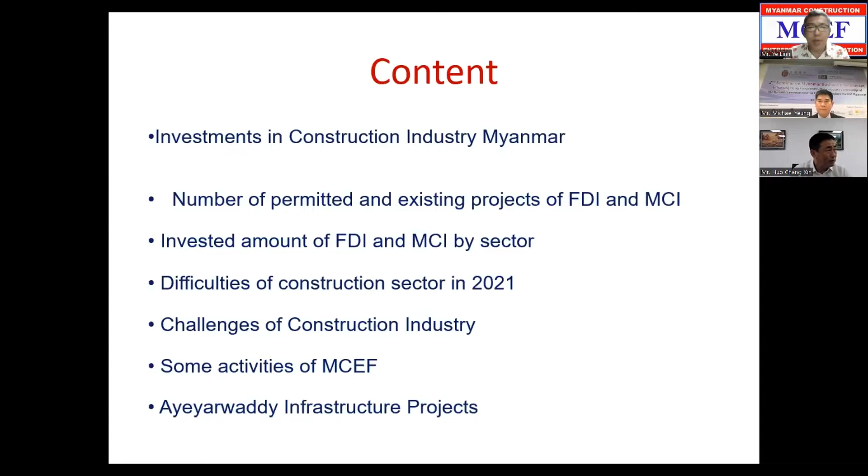Myanmar Construction Entrepreneur Federation, MCEF, was established in 1996. Since then, Myanmar's 15 states and divisions each have an MCEF chapter. MCEF has around 10,000 members, making it one of the biggest federations, with quite diversified business as well. Our members are not only in construction, but also banking, hotel and tourism, mining, manufacturing, logistics, and trading sectors.

The construction industry boomed from 1993 to 1996, then slowed down in 1997 because of the Asian crisis, and again in 2003 because of the Myanmar banking crisis. From 2015 to 2021 there was another slowdown due to the COVID pandemic. However, now is the right time, with less competition, to invest in Myanmar.

Myanmar construction companies have stayed behind other ASEAN countries in technology, skills, and funding. Funding is the biggest weakness in our construction industry. Regarding power, most LNG-based power generation has stopped due to LNG price increases, so Myanmar has reduced 1,500 megawatts, which is a lot. This has cut power to manufacturing, plus foreign sanctions affected LC and freight charges, which went up many times.

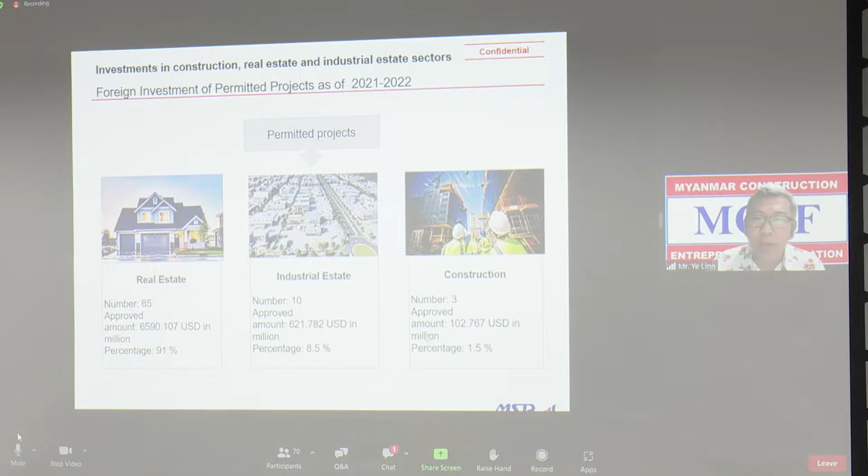We can see in this slide that most foreign direct investment goes mostly into real estate. 91% is higher than other sectors - for example, industrial estate is 8.5%, and our construction industry got only 1.5%. We can see nearly 7,000 million US dollars in real estate investment by foreign direct investment, FDI.

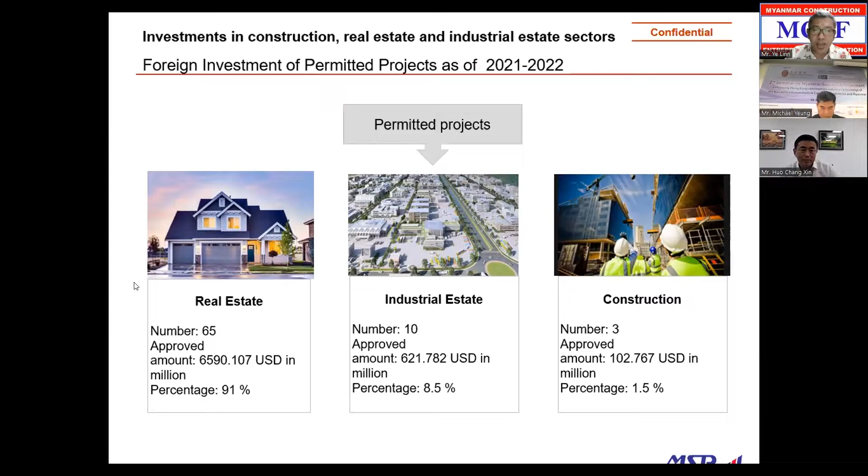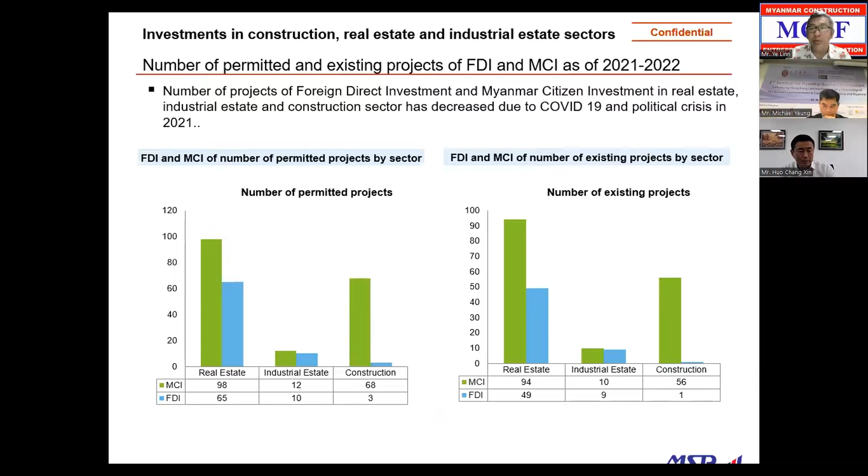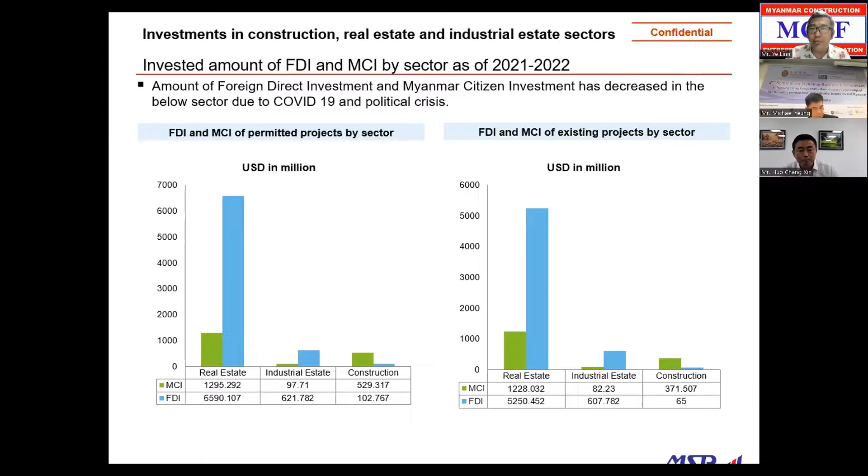Around 7,000 million US dollars in real estate investment. The amount of foreign direct investment and Myanmar citizen investment has decreased in these sectors due to COVID-19 and political issues so far. According to this slide, we can see the existing projects also show FDI investing more, around 5,250 million US dollars in real estate. FDIs invest in real estate more than in industry and construction sectors too.

These difficulties caused a decrease in our construction sector last year. Number one, construction ceased because of COVID and some political issues. Number two, the price of building materials increased because of the high exchange rate. Number three, the price of locally produced construction material doubled because of the banking crisis and higher transportation costs. Number four, the main issue - private banks ceased offering loans after February 2021.

Some constructors are not bidding for new projects because of the crisis, limited profitability, and difficulty in getting loans from banks. In Myanmar, our local bank loan interest is higher than international rates. That's why our local contractors and local developers cannot compete with foreign direct investment and foreign construction companies.

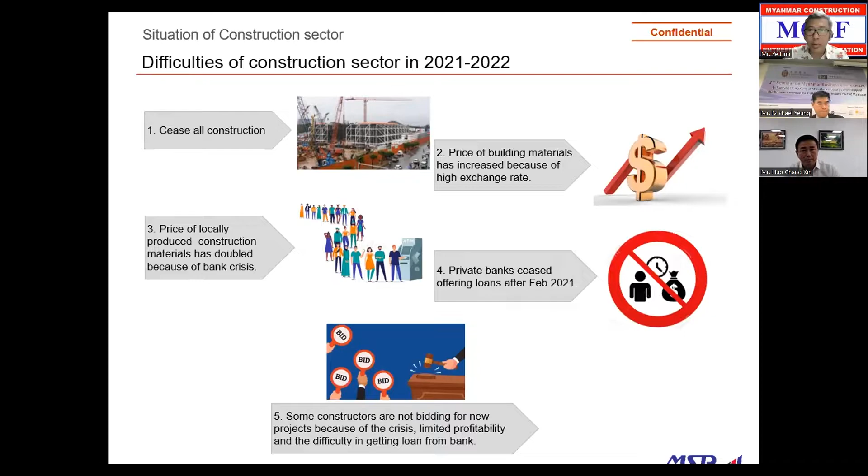Regarding the wages of construction up to date - actually we have to pay 9,000 kyat per day to general workers, which is nearly equal to $5 US per day. That's only for general workers, because of living costs and the rate for some skilled labor.

We can pay them only 250,000 Myanmar kyat per month, but we need to pay long-term workers 400,000 to 500,000 Myanmar kyat. We need to pay 12,000 Myanmar kyat per day to semi-skilled workers, and around 50,000 or more to skilled workers. Actually, this skilled worker shortage is one of the main challenges in our construction industry in Myanmar.

May I highlight the building material price. Actually, Myanmar needs 90% of imported materials from foreign countries, 90% by sea and border trade, especially from China, Thailand, India, Malaysia, and so on. We can produce around 10% locally, especially cement, but we can't buy local cement easily because of the higher price, transportation costs, raw material costs, and electricity. You can see here, HRB 500 MS rod is around 700 US dollars per ton on average.

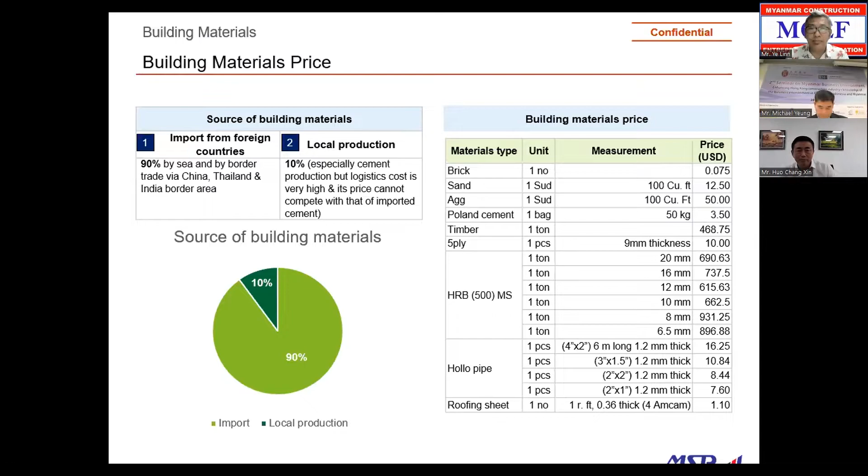May I highlight here housing projects in Yangon, Mandalay, and Naypyidaw. These are working together with the Ministry of Construction and our MCEF. We have bidding for a 100,000 rooms project in Yangon for rented housing, especially for local government staff and low-income people. We need to share this with the construction industry members.

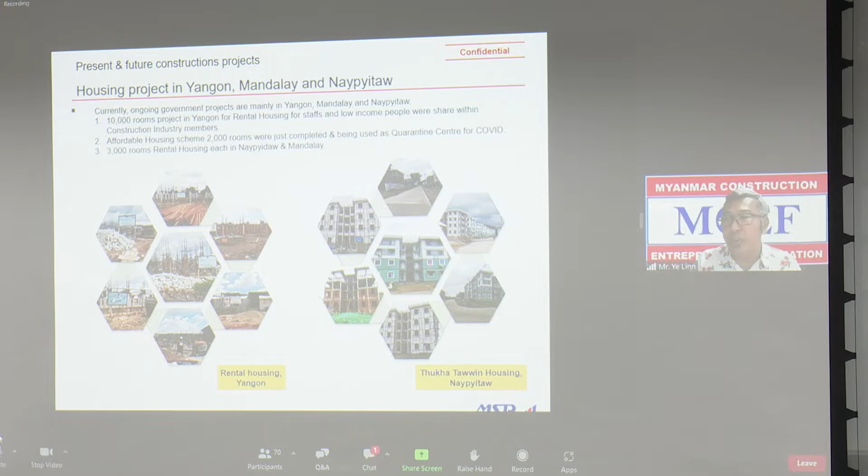Three years ago, we built affordable housing with the Ministry of Construction, around 2,000 to 3,000 rooms. Luckily, we could use these rooms as a quarantine center for COVID. Up to date, we are under construction for 3,000 more rooms, each for rental housing in Naypyidaw and Mandalay.

The government plans to build all of the housing projects in these three biggest cities because of the population, and actually the Ministry of Construction plans to build around the country. You can see this picture. This is a main weakness in our country.

We are still using timber and plywood formwork systems for all of the local construction. Actually, our MCEF proposed to the Ministry of Construction to allow precast construction for these housing projects.

Unluckily, we could not pass through easily with this discussion, so we are still under discussion. That's why may I invite all foreign investors to invest in Myanmar for this precast construction project. I think the Ministry of Construction cannot easily allow our local construction companies to build with precast construction because of initial cost, quality control, and government rules and regulations.

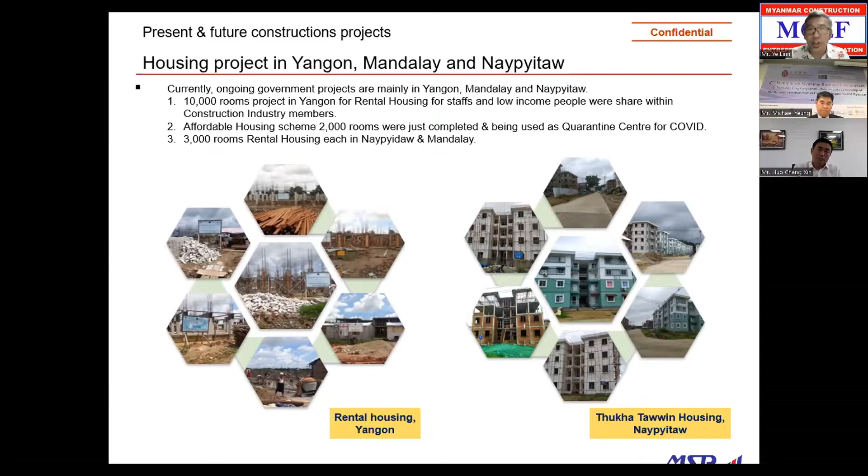These are the latest housing projects in Myanmar. Our MCEF is involved in all of these projects. These are also normal construction methods we are still using.

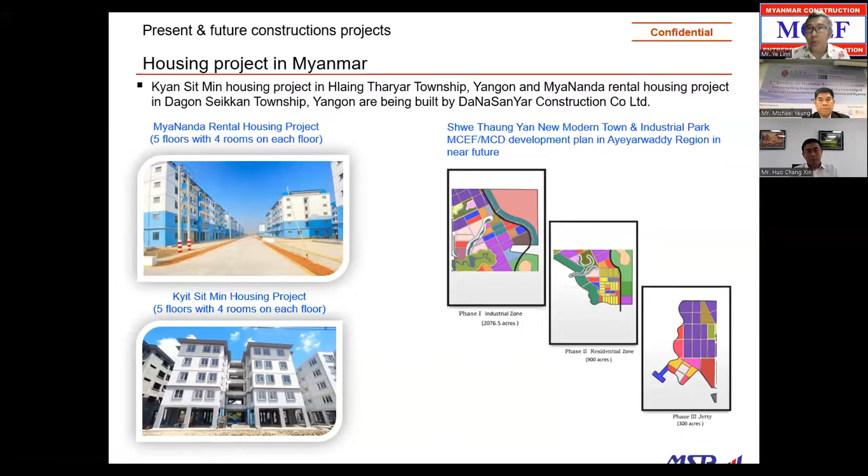Actually, we try to use system formwork, PVC formwork, and steel formwork, but we can't use these formwork systems so far because of initial cost and construction cost. That's why our MCEF plans to build a precast housing project in Shwe Thaung Yan New Modern Town and an Industrial Park development plan in Ayeyarwady region in the near future.

Our MCEF is one of the members of the ASEAN Constructors Federation too. That's why we are involved in monthly meetings, discussions, knowledge sharing, and general yearly meetings too. And we share with each other country reports.

Moreover, organizing with ILO, we cooperate with ILO to promote our construction industry through a TOT course regarding occupational safety and health, the OSH program, for our workers - semi-skilled workers, of course, as well as managers and site engineers.

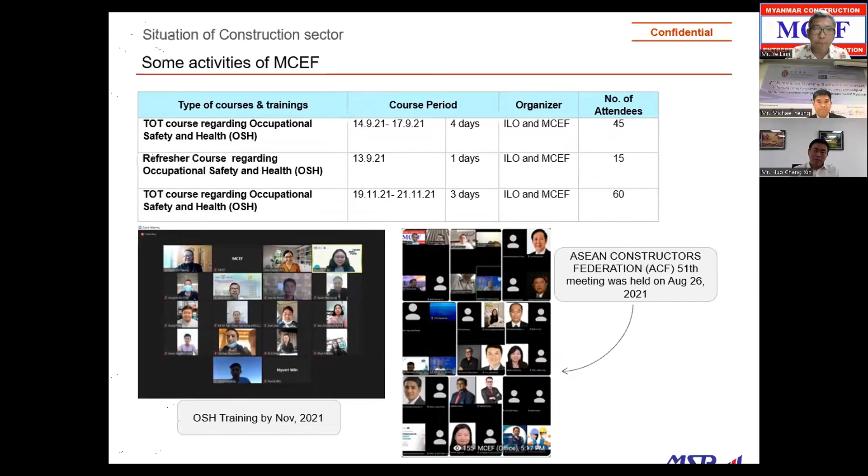May I highlight our MCD, one of our MCD infrastructure projects here. There are five or more areas where participants can join with the MCD or MCEF group. Number one, deep sea port construction - EPC and finance may be available to invest with your FS process.

Number two, industrial zone - this is a heavy industry zone. We plan to build the heavy industrial zone because of the deep sea port. Number three, coastal town and support town for these projects. Number four, highway project from Yangon to this Ayeyarwady deep sea port project, and also a coastal road project.

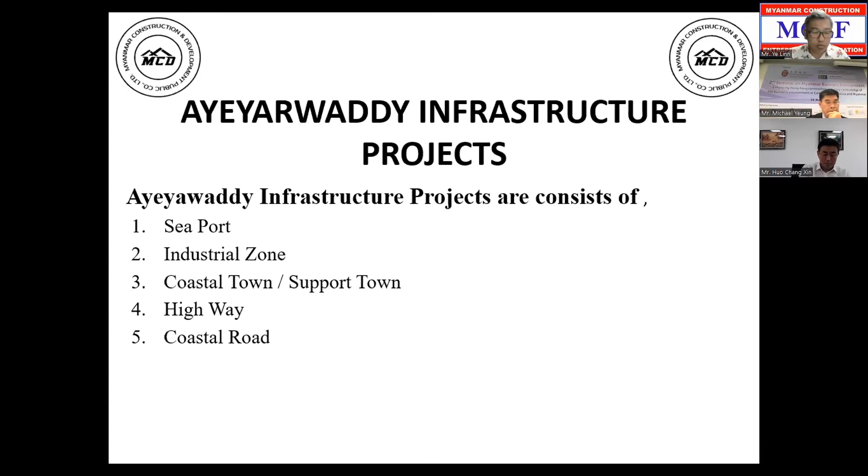This is the seaport. We plan it southwest of Yangon, about 120 miles away, near Chaung Tha Beach. The deep sea port project area - MCD joined with Power China for a pre-feasibility study last 3 years, with some support from Royal Haskoning Company approved to proceed with the feasibility study.

This area is famous in the British Admiralty Chart, mentioned as Danson Bay. It's about 4 miles wide and 4.5 miles long, U-shaped, with a natural breakwater that can be improved into a proper breakwater system without heavy investment. We are expecting around 20 meters depth for 100,000 ton ships to be handled, by dredging sand and surface to build the seaport facility.

The existing Myanmar port is only on the Yangon River since 1890, and due to heavy sand deposit every year, the river became shallow and narrow. Because of this, the Yangon City port area can only handle 12,000 TEU ships, with tight timing.

Near Yangon, 10 miles away, there is the Thilawa Seaport, a project led by Japanese investors, which can only handle 20,000 metric ton vessels. This means Myanmar relies only on feeder vessels from Singapore, with extra handling costs to reach Myanmar.

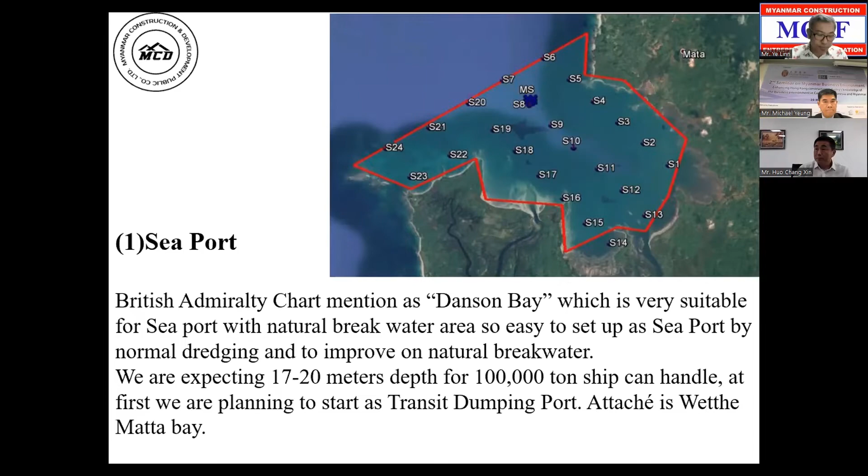Existing deep sea ports include Kyaukphyu for China and the Dawei deep sea port for Thailand. That's why our deep sea port project is only for Myanmar, to get bigger vessels to operate in the Myanmar basin. Myanmar's business paradigm will change with cheaper land to invest in, promoting Myanmar's economy and boosting business.

Regarding deep sea port development, we negotiated officially with the Ministry of Transport and Communications and the Myanmar Port Authority, and they allowed approval for a feasibility study. We need to show the following partners.

Number one, a port operator who will operate it. Number two, an experienced port designer. Number three, a port construction company, identified with the feasibility study and experienced in construction, to proceed with FS, EIA, and SIA for this project.

Our MCEF and MCD will put our land as a share in seaport development, with at least 25% share, and we are inviting a 75% share from the foreign side. Our project's estimated tech cost is about $2 billion for the first phase.

Number two, heavy industry power with a support coastal town. Our organization has about 10,000 acres of land adjacent to the seaport area, which can set up heavy industry. The seaport can handle many vessels, so regarding petrochemical plants, oil refinery plants, steel mills, and other downstream projects too.

The existing Myanmar port is only a river port with a lot of restrictions. That's why this area will become Myanmar's first real heavy industrial park. Regarding Russian crude oil, we can produce a lot of downstream products from the petrochemical plant. These petrochemical and refinery products can have a big market in India, Bangladesh, and Southeast Asia too.

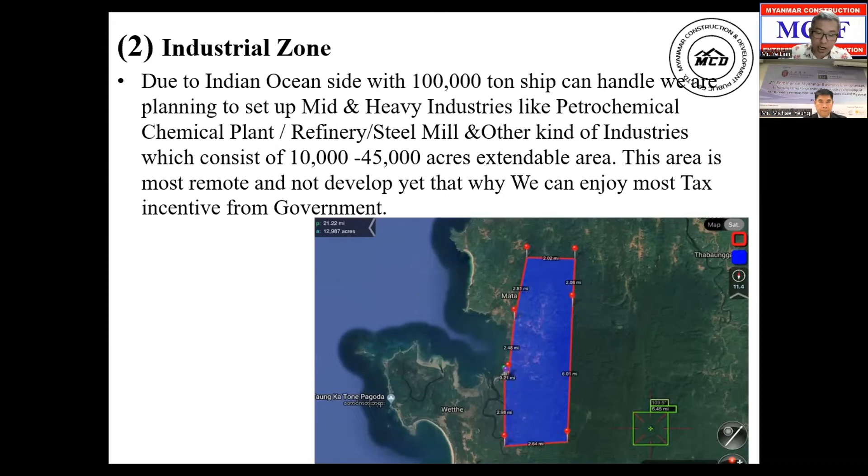Actually, BNI is looking for a glass factory, ceramics, and household utility industry together with our MCD. The LNG power project is only a few miles away from our seaport and industrial zone, supporting a coastal town for the industry zone project.

Our infrastructure project area is in the most remote and undeveloped Ayeyarwady Division, which also has a lot of human resources for workers and project development. Land prices in Yangon and Mandalay are very high and not of interest to investors, but this area offers very low prices and heavy industry can be established easily here.

They can get foreign investment to establish an Indian Ocean port, as well as heavy industry like petrochemical plants and steel mills. Korean and Chinese investors for garment factories are also very interested in this area, and they plan to produce CMT products, shipping finished products from a factory in the Yunnan province. They are willing to set up in that area with the 100,000 metric ton seaport together with this township.

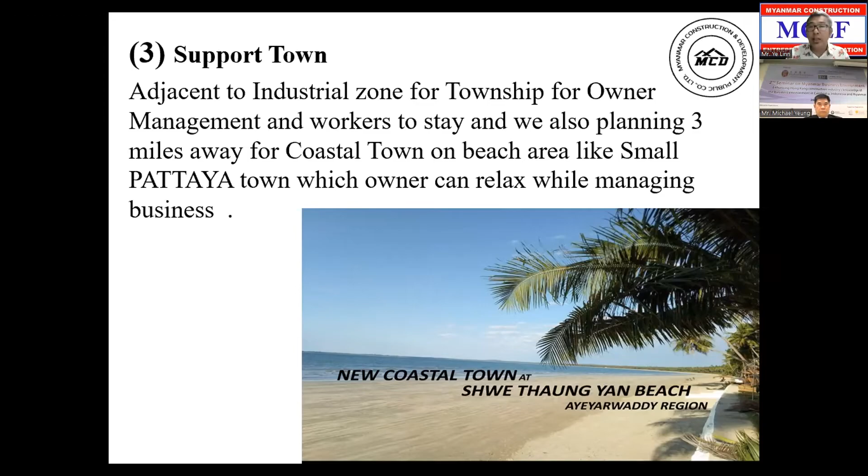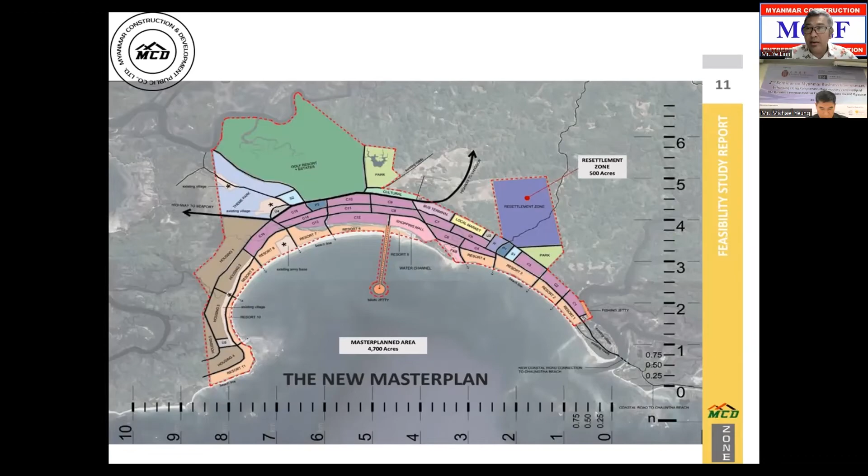This is our proposed master plan for this project according to the Ministry of Land and Transport Authority. Number four, may I highlight the highway.

Our planning takes an idea from Thailand's Bangkok and Laem Chabang seaport, which is 120 miles apart. Likewise, our project is only 106 miles away from our business capital, Yangon. The Yangon port currently relies only on the river, which is very difficult for big vessels, and that's why most cargo transits through Singapore.

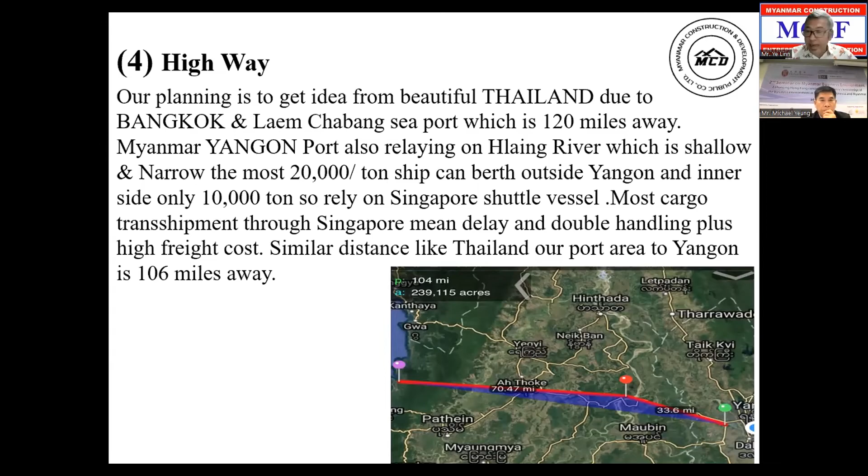This means delay and double handling, plus high freight costs. The highway is 3 miles from the Ayeyarwady West Bank Highway. Just now, Mr. Cho highlighted the highway project, and we can link to this government highway project.

Number five is the coastal road. Actually, this coastal road is the most important road to Ayeyarwady Division. Both the regional government and union government are very interested in developing this area, with security measures also needed.

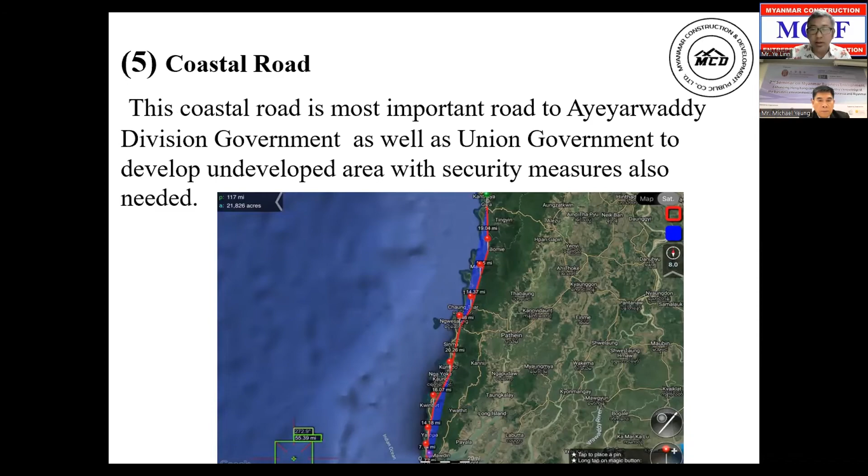Okay, may I conclude my presentation here together with some of the challenges. First of all, Hong Kong contractor industry is so new to Myanmar, so our federation can assist you to get the right partners and projects. Regarding project and partner approval from union or regional government, MCEF will assist, as well as the Myanmar consulate will support too.

The biggest challenge is to know the business nature and system of your business. Most construction material has to be imported from abroad, so you can overcome these challenges too.

Another challenge is the language problem. However, subcontractors and contractors can get a translator easily in Myanmar.

Another thing is skilled labor. Most Myanmar skilled workers don't have certificates, but those who don't have certificates are skilled.

The most obvious challenges are: one, country risk; two, currency risk; three, system risk; and four, payment risk. Number five, working environment risk and others.

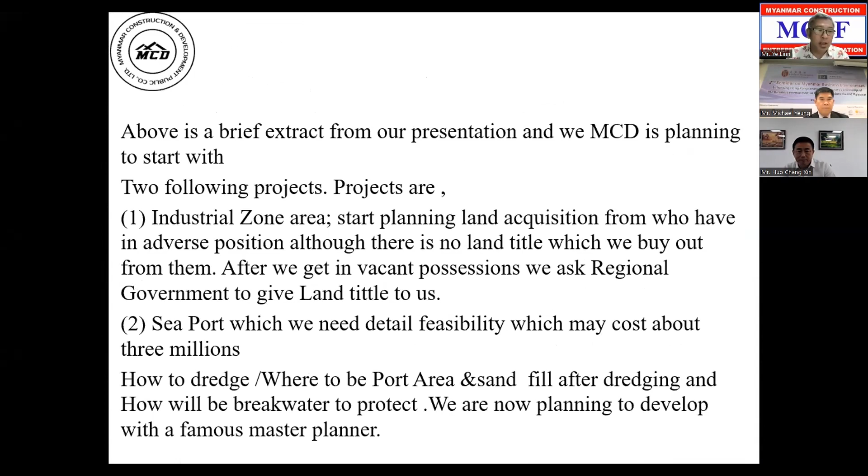MCEF warmly welcomes the Hong Kong Contractor Association to visit Myanmar to explore your opportunities.